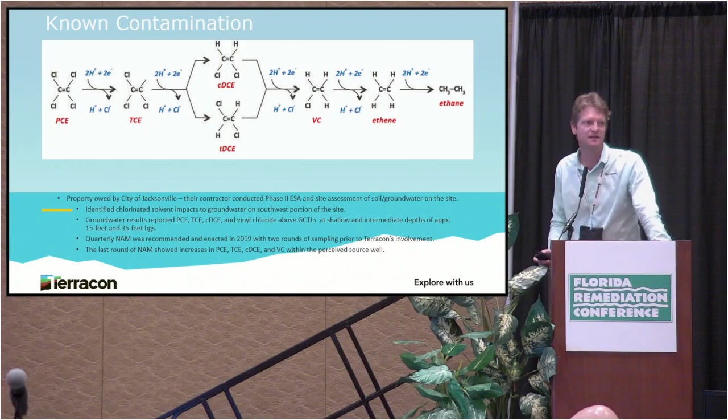So, you guys read that? I can't, no. Okay, so

Anyhow, so back in December of 2019, they wanted to start construction and work on the property. They also wanted to get to a clean closure of the site, some level of closure, ultimately clean if possible, and clean by means of RMO1. However, that was quickly defused, considering the contaminants and the timeline that they wanted.

So at that point, we went into discussion on what type of aggressive remedial action can we put in place to at least get this to a point where they're comfortable moving forward with redevelopment, and they feel like they're going to get to some point of closure in order to meet the expectations of their future end user, as well as the expectations of those who actually want to buy the property from this client of ours.

Essentially, they're a build-to-suit, lease-back type client, and they have a timeline to do that, by which their financials, spreadsheets make sense. They're either going to make money or they're going to lose it. And so time is of the essence. I don't know any deal that doesn't include a timeline and a lot of money at stake. So that said, we were put under a lot of pressure to come up with some sort of plan.

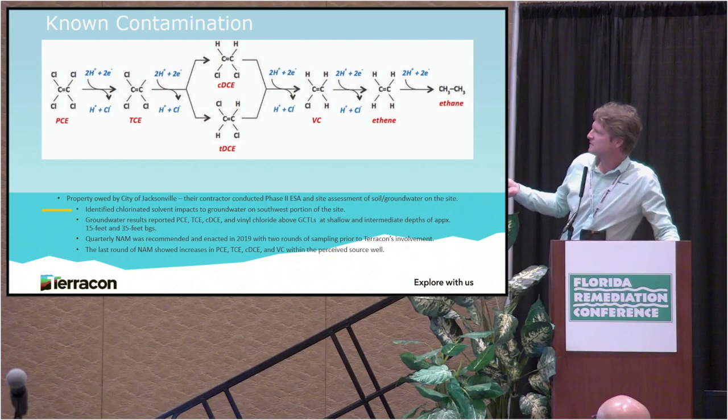Let's see if I can. Hold on a second, guys. I know I have a pointer somewhere. There we go. All right.

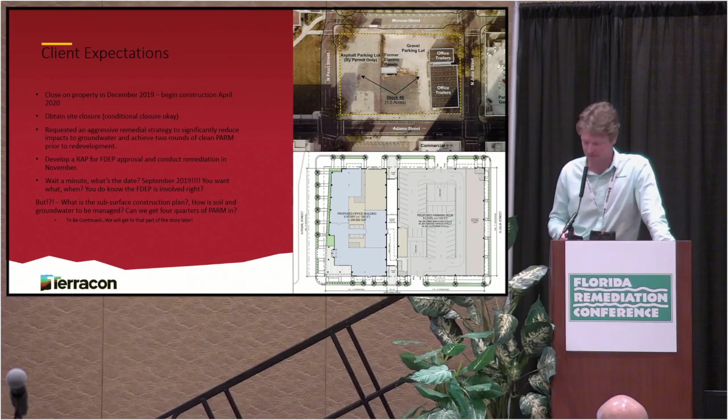So this is what the site looked like when we started doing work, and this is essentially what they wanted to get it to. All right. So nothing, something. Moving forward, we were asked, how can we get to an endpoint by April of the following year, so they could start redevelopment. Well, obviously that wasn't going to happen, but we would do our best. So we'll get into the details of our remedial strategy and what we had to do.

So Chad, you can raise your hand. So Chad's over here. Chad's now with Terracon. We brought him to the dark side. Thank you, Chad, for coming on over. But Chad was with Regenesis. We have Regenesis here too. Just trying to plug you guys, but you didn't have to show up. There you go. All right, very good.

So we worked with Regenesis. We worked with Chad at the time, who was with Regenesis, and kind of tried to come up with a way to tackle this, if you will, with as much firepower as possible. Again, we had a quick timeline imposed on us by the client, and that was dictated by the fact that we actually had an open site to work on, and that was not going to be the case for too long.

So I developed a remedial action plan with the help of Donna Klein, who happens to be sitting on this panel, and we finalized the decision to use the applications that Regenesis was offering, and you can see those there using the PlumeStop liquid activated carbon, and then all of their registered trademark names that you guys can read. I'm not going to go through them. So what was proposed was a series of 30 injection points.

More importantly, beer. So Chad and I had a friendly little wager that we could develop this remedial action plan and get it submitted and turned back by the DEP in 2 weeks to meet deadlines. We made that happen. That would not happen now. Are there any regulators in the room? No? Good. Okay. So you're not getting it in 2 weeks these days at all. In fact, I don't know how we did it then, but I guess it was written well. That's all I can say. So anyway, we won a case of beer. Chad actually did come through, and he sent it to me.

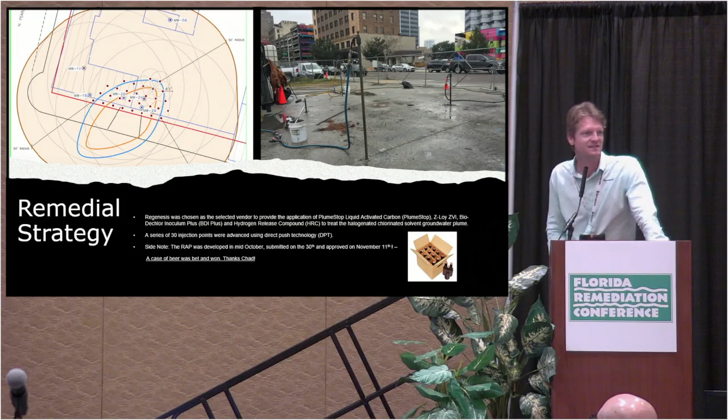It was nice. All right, so we go through, we do the injections. We put 30 points in the ground. You can see it on the prior slide. Let me go back. Yeah, so you can see injections, you get the picture, right? We've got the rig out there, we're getting things nice and dirty, and we're making things move in the subsurface and hopefully go away.

That's the plan. So we start doing our sampling. We got the DEP also to agree that we could do our post-active remediation in January of 2020. Mind you, we did the injections in December of 2019, so we didn't give it a whole lot of time to, activate, if you will, since we're using activated carbon.

Right, Chad? Thank you. Dad joke.

All right, moving on. January 2020, we do the first quarter. Things are looking pretty good. We're seeing some concentrations exceeding the GCTLs, but it's actually lower than it was previously. We move into April, and things continue to decline and are looking pretty good, but of course we're still exceeding GCTLs. That's okay, right? We don't care if we're exceeding GCTLs.

We're trying to, at this point, get to a closure that is showing shrinking and or stable, right? Hopefully many of us have been down this road before. Then things start to progress in July 2020. We're only looking at vinyl chloride at that point. That's the only well, and it's hard to tell you here, but the wells are in this corner of the property.

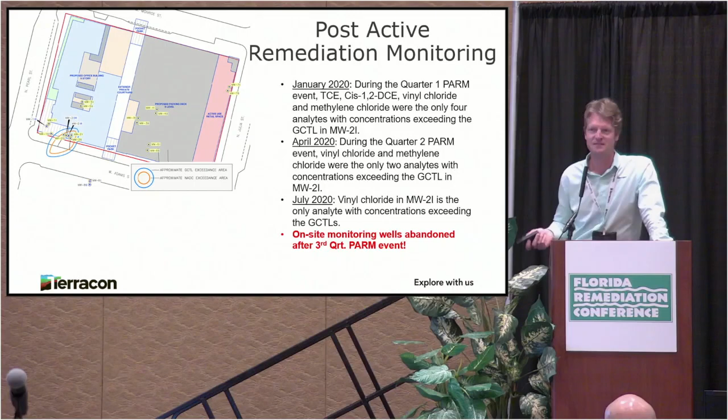So we told the client, look, whatever we can do to keep them there would be great. And they said, that's impossible. We're going to have to move forward. And at that stage, you're going to have to basically remove these wells, come back, reinstall them, and you guys see where we're going here. Not good. So site redevelopment occurs.

We've got a 3-month groundwater discharge permit that we obtained from JEA, and that's ironic, and you guys will know why later. What could go wrong, right? So the client was forewarned that, hey, we have a very limited time frame. Maybe we should wait and do this later, right?

Maybe it would be better to get some site redevelopment work going and maybe do the injections at a point in time before you start doing some heavy earthwork and start moving some things around. But they felt pretty confident in our plan and said, hey, let's go for it. So we did. But what happens when you dewater? Lots of stuff can happen, right?

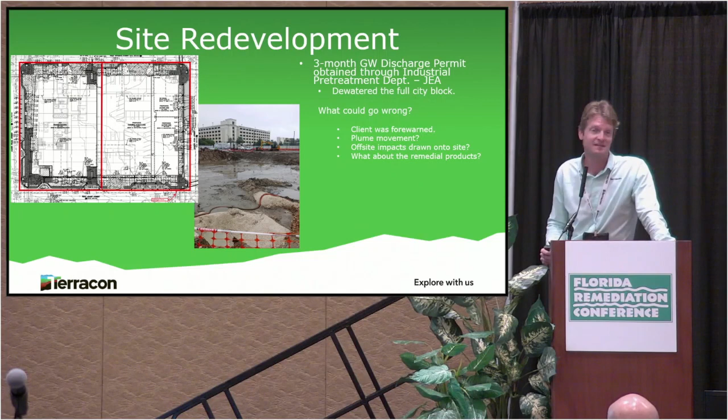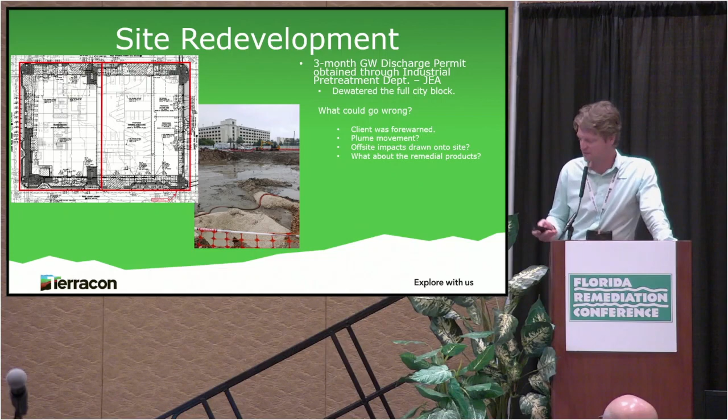We're in the downtown area. There's just a lot going on there. This is not the only site that's impacted, guaranteed. Is it the only one that's registered and impacted? Probably not, right? There's multiple undocumented sources, and again, layers and layers of history. So could you bring offsite impacts onto the site? Of course. What happens to those products? I guess we'll find out, won't we? Oh, wait, then there's more.

Now, I can't get into the details of this too much for the sake of client confidentiality, if you will. But let's just say that things took a little longer than they were intended to get to the site redevelopment goals of actually going vertical on the site. And what does that really mean for this story? It means that dewatering was done a bit more aggressively than expected. There were a lot of things that needed to be done to remove some things that you may be able to see in this picture.

And without going into great detail, lots of water, lots of subsurface removal of things, lots of things were identified and found and removed, and that took time, that took money, and that made a client very unhappy. So was that our fault? No, they bought this property knowing that nobody ever wanted to buy it before them, right? It sat there for years and years, and I think our city representative that owned it was happy to see it go once they realized what they had kind of handed off.

So that said, yes, there was a hotel there. There was a parking garage there at one time. There were lots of different buildings and uses. Let's just say a lot of that never went away.

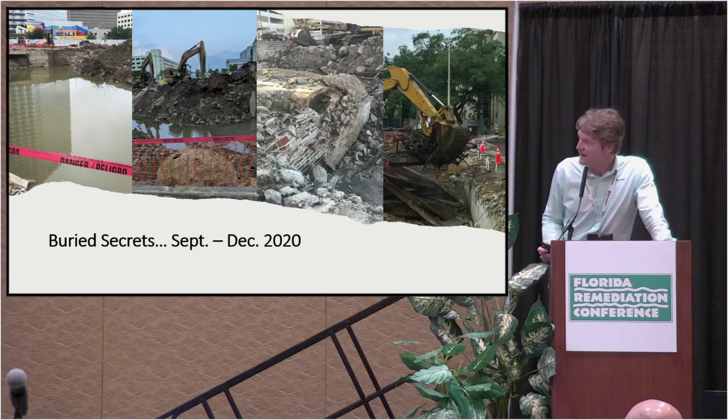You just couldn't see it. So moving forward, what happens? Following the development, we go back in, and at this point, we've got a lot going on this property, right? The client's saying, hey, we want you to go back out there and take care of this. And mind you, this is the type of client that has maybe 5 or 6 different parties that you have to talk to get an answer or to get anything moving.

And one's environmental and most of them are construction. They don't mix. We don't mix with redevelopment partners when it comes to general contractors. It just doesn't happen very well in the real world. So this client was like their own worst enemy, and it took a while, but we finally got the GC, which was their own general contractor in-house, to give us the green light to get out there and work around

other contractors. And you can see they're going vertical, so we're putting wells in adjacent to what was the right-of-way and within the building footprint itself, and generally making the general contractor furious every day. Good times. So we installed these wells. We get everything taken care of. We start doing sampling, and of course, lo and behold, the subsurface concentrations and everything is just out of whack. Not what we were dealing with back in, I think it was July at that point.

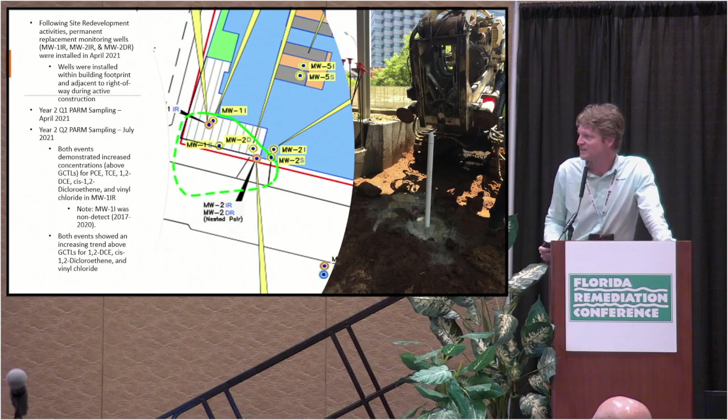So essentially starting over. Of course, then we had to redevelop a RAP, go back to the DEP, which didn't happen in 2 weeks this time, unfortunately. I didn't get any more beer. And the client was not very happy about the timeline, and at this point the GC is getting very upset that we are going to go back out, not only install wells that he has to protect during his construction,

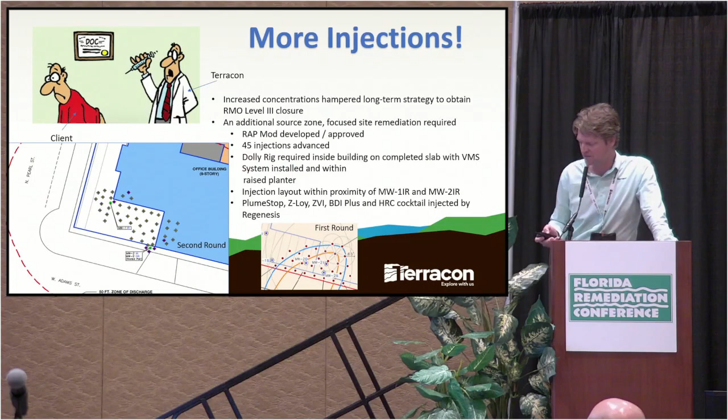Now, the other part of this is during everything that we did, of course, we had volatiles and we had groundwater issues, et cetera. They decided to put a vapor mitigation system in place. We helped them engineer that. We instituted that. We oversaw the installation, but then we just drilled some holes through it. So they weren't too happy about that either.

Now, there was a way to go back and overlap the membranes and get it all fixed, and it passed the smoke test, and it works. But bottom line is you end up with this ripple effect of one thing leading to another, and here we are working alongside, and I didn't show it on here, but Terracon's extremely big on safety. It's a big part of our culture.

We had to stop working multiple times because wrenches and various pieces of equipment, as well as pieces of the building itself, were falling on top of us. So good times.